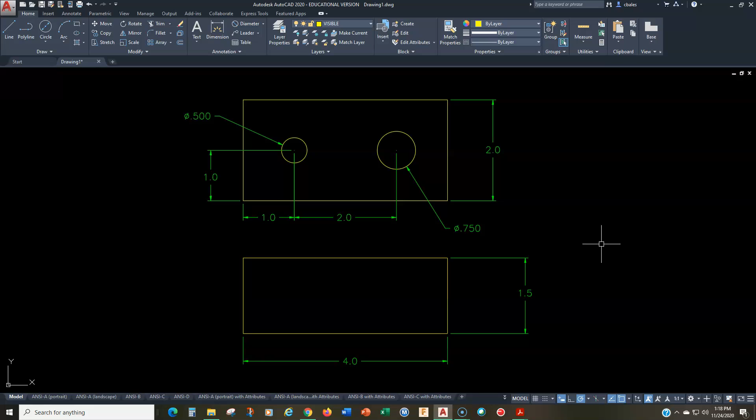Okay, so where do we go from here? Well, first let's change the top view to make this correct. This is not how we represent a tapped hole, right? So we need to change this. First of all, we're going to change this and this to a hidden circle. Now, I'd like it to have more dashes, so I'm going to change the LT scale, so we can type in LTS, and then I'm going to change this to 0.5 just to make it look a little bit better. And then we have to create a second visible circle on the inside of both of these. So the outer circle, the hidden circle, is the 3/4 inch and the 1/2 inch.

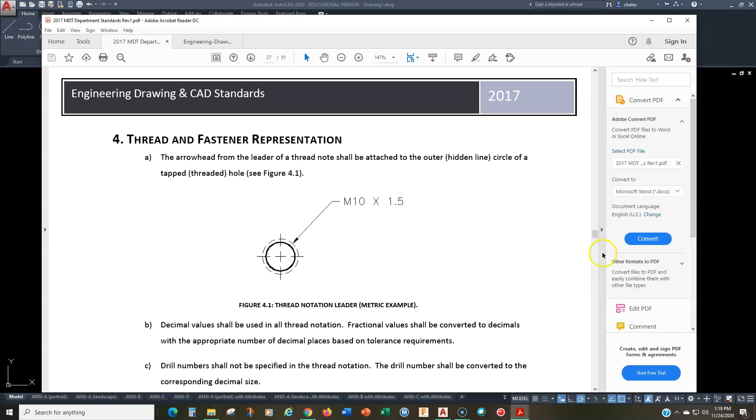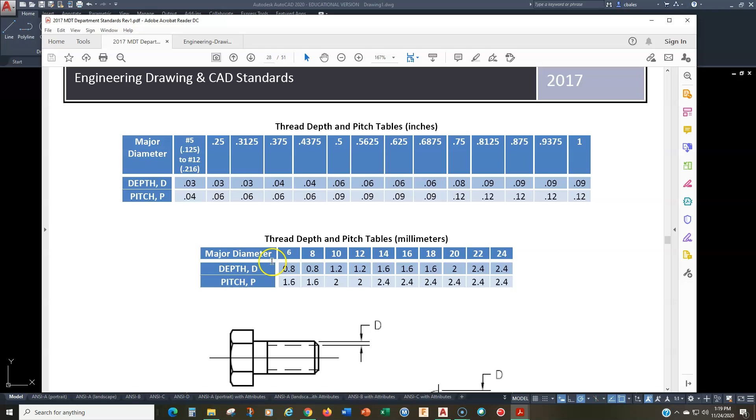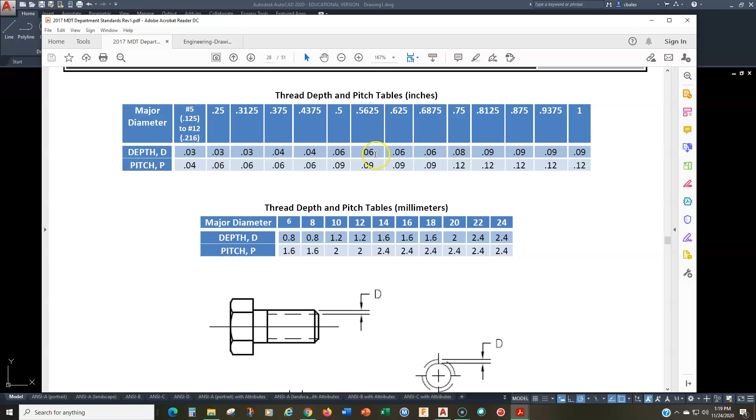So where do we get the dimensions for the offset for the visible circle? Well, we get it from our CAD standard. So I'm going to bring this over. This is our CAD standard, and I'm going to go to page 28, and you'll see right here, this is a table for inch threads. The top table is inch threads, and the bottom table is millimeters or metric threads. And what we want is that dimension D. You can see for a major diameter of a 1/2 inch, the D depth is 0.06. For 3/4 inch, the depth is 0.08. So 0.06 and 0.08.

So let's bring that across here now. Let's go to offset, 0.06, and then we're going to offset that inward. And then we're going to change this to a visible line. Very easy. So let's do that again. Offset, now this is an offset of 0.08. There we go, offset it in. And then we change that to a visible line. So that is the top view pretty much completed, minus the center lines and the dimensions.

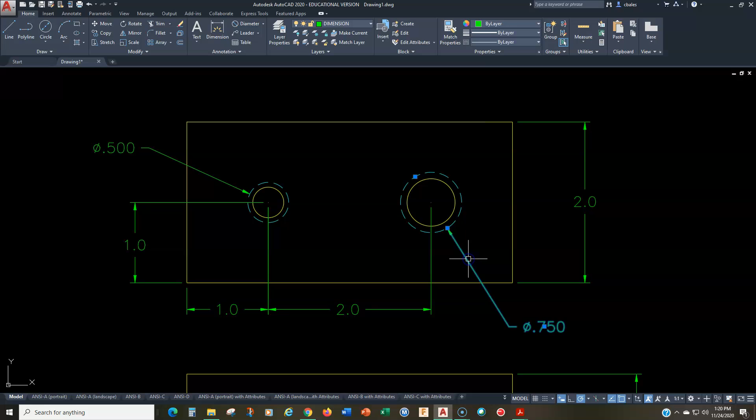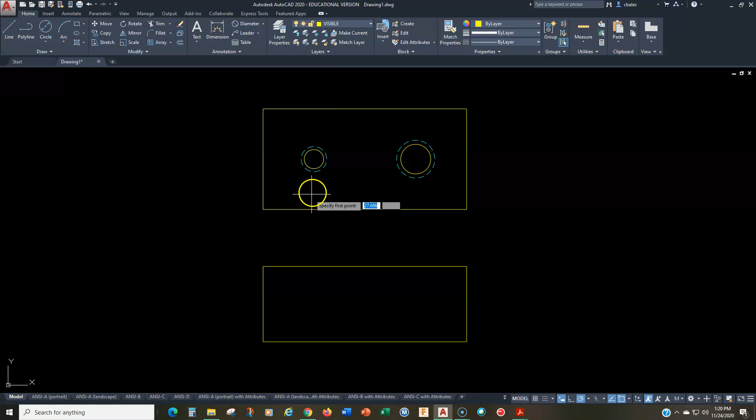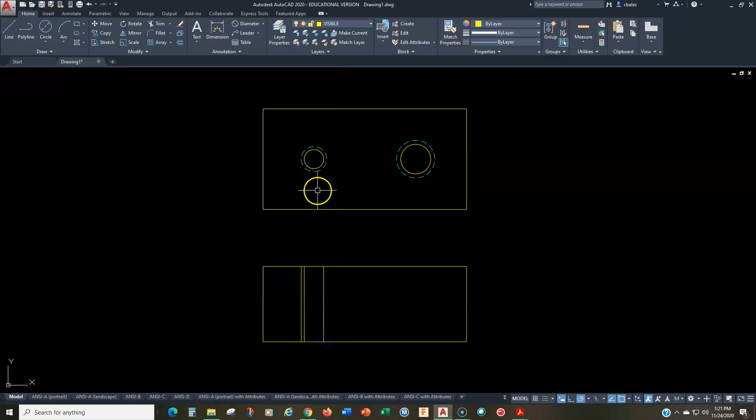So I'm going to delete that. And we don't need any of this, this is just going to make things messy. So we'll just put it right there. And again, let me just delete these because we don't need them in here. And now to work on our front view. So the first thing I'm going to do is project this edge down, and this edge down. Do the same thing over here, being very careful to get the right line. Of course, there's a million different ways you can draw this easier than the way I'm drawing it, if that's what you want to do.

These outer lines are going to be hidden. Now, if we look at the definition of this, it says we're going to draw a front section view, and it doesn't say anything about these being blind holes. So they're going to be through holes. So that's going to be the 1/2 inch major diameter hole completed. Now let's go over here and do this one. So again, we'll draw a line and I'll just project this down. Let me zoom out a little bit. Project this down here.

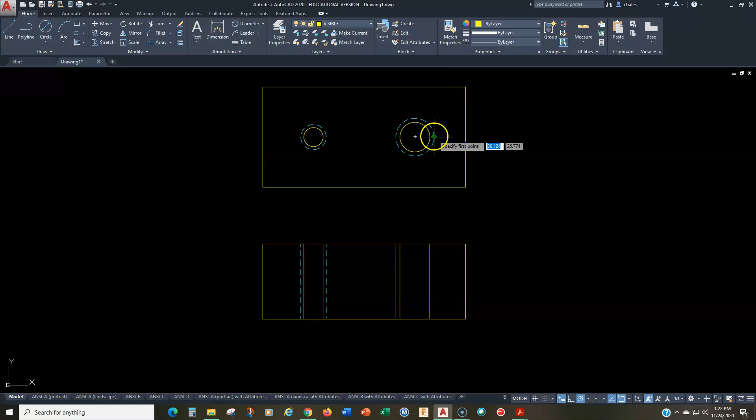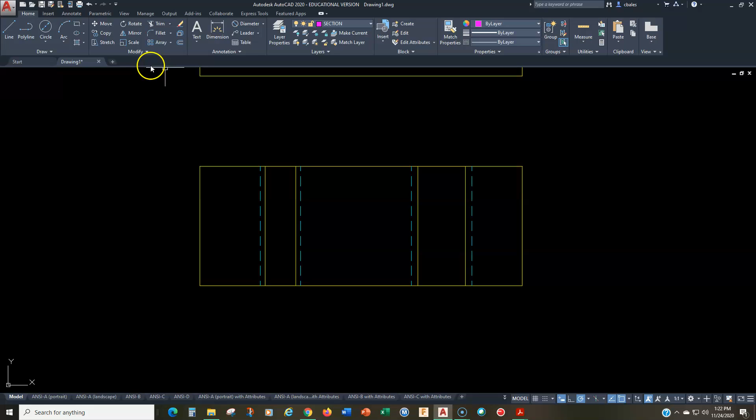All right, and then this line and this line become hidden lines. All right, now let's turn this into a section view. So I'm going to change my layer to the section line layer. And we're going to go to the hatch command. And I'm going to apply my hatching here.

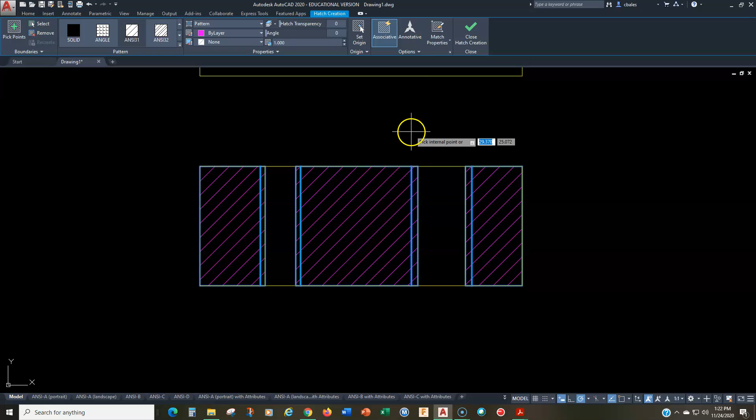And in this space, and here, and in this space, that little space, and then there. I think that scale is fine, so I'm not going to mess with that. Of course, the angle is perfect, so I'm just going to close that. And then there we go. All right. Now, the last thing that we have to do here is we have to dimension this. Okay. Actually, and add center marks.

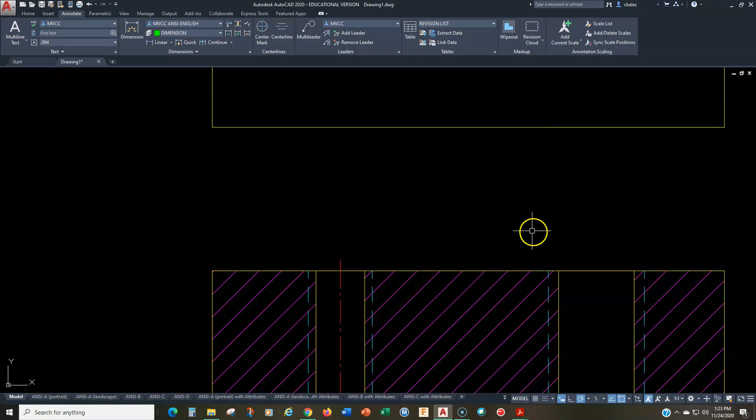Okay. So let's pull this back in again so we can see what this is. So the first one is a 1/2 inch major diameter Unified National Fine Threads Class 2. So there's one bit of information that's missing here, and that is we don't know the threads per inch on this. I did not give you the threads per inch. But we have enough to refer to the table, okay? So let's go to the back of our book, page A7, right there.

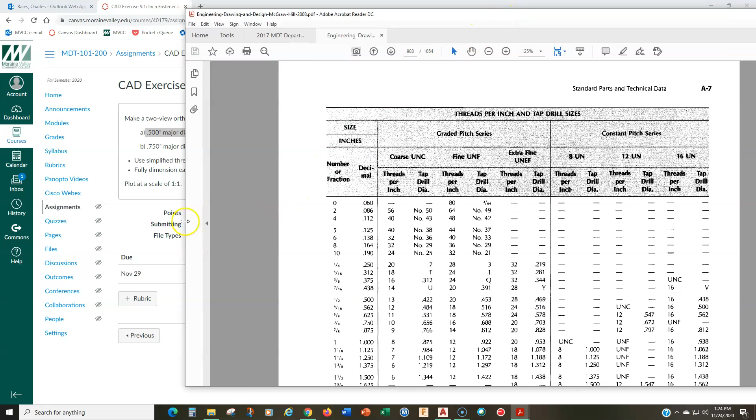Let me shrink this up a little bit so maybe we can see both. There we go. All right. And we're looking for a 1/2 inch major diameter. So I'm on page A7, and the size here, I want to go to a 1/2 inch, which is right there. And you can see for a coarse thread, the threads per inch is 13. Well, this is fine threads. So we need to go over, right there, fine. We read down and it says 20 threads per inch.

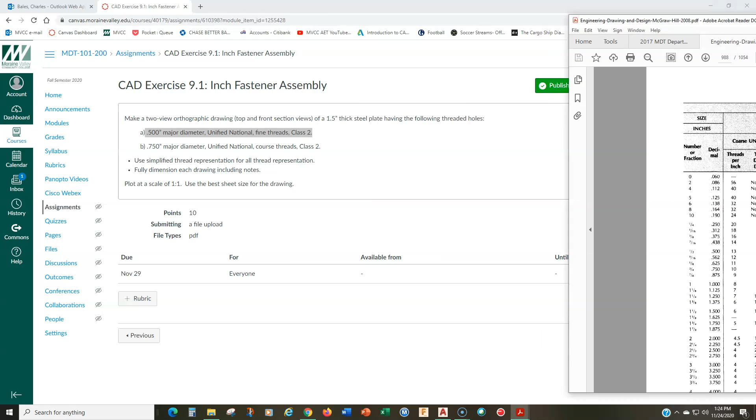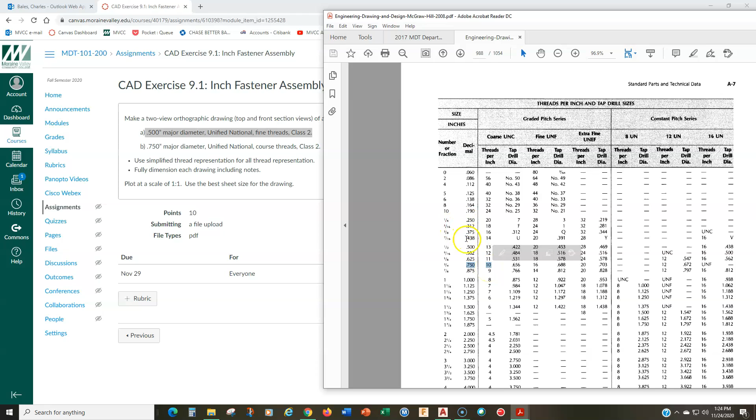Okay. So while we're here, let's do the other one. This is a 3/4 inch major diameter Unified National Coarse. So we go to 3/4 inch. Unified National Coarse is 10 threads per inch. So we got 20 threads per inch and 10 threads per inch. All right. So let's get the notation done for this. So we go back to my drawing.

We're going to use a leader, right? I suppose you could also use a... Actually, no, sorry. We are not going to use a leader. Don't use a leader, right? The leader is not what you want to use for this. We're going to use a radius or diameter dimension and just get rid of the note. Okay, so I'll show you. So we'll go here to radius. I am going to choose the outer circle here, the hidden circle for this. All right, so we'll go right there.

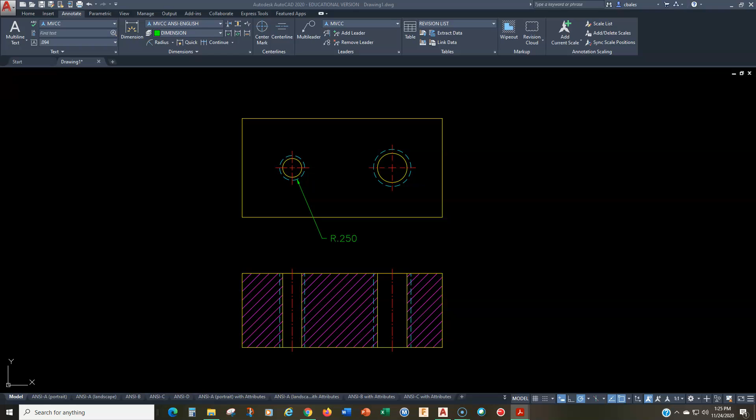All right, and the reason why I'm choosing the outer circle is because in your standard, it of course shows you we dimension to the outer circle. Okay. All right, now the radius 0.25, 0.250, I don't want any of that. So I'm just going to double click on that, delete that, and I'm going to put in what I want, which is the thread note, 0.500-20 UNF-2, and this is an internal thread, so it gets a B.

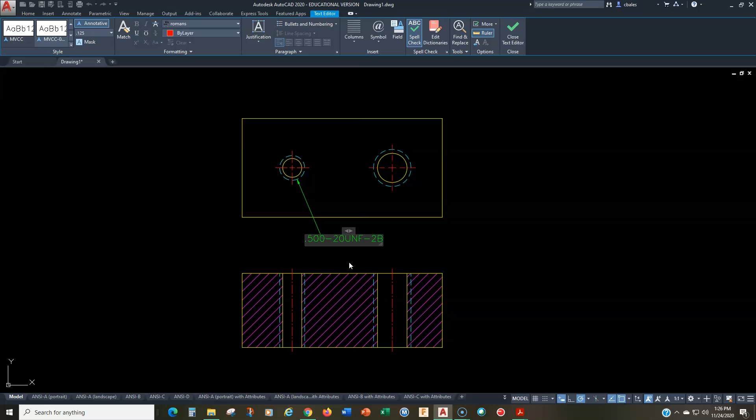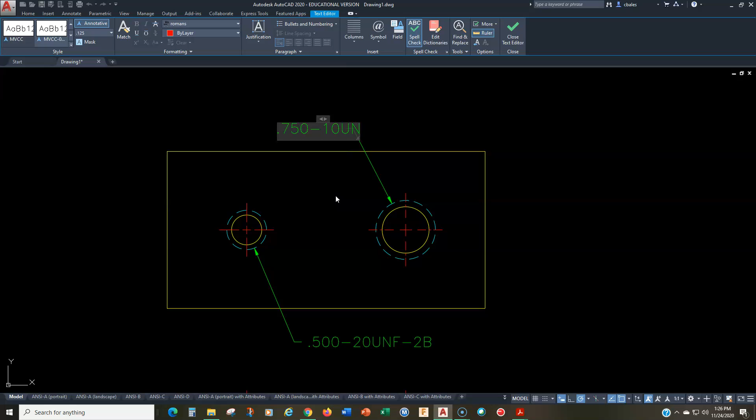All right, and that's it. Close text editor. All right, there's our thread. All right, now let's do the top one here. Whoops, sorry about that. We'll go back to radius. We'll click on the outer one, and I'll put it right up here. And then we'll double click in that, hit the delete key, and we'll go 0.750-10 UNC-2B. And that's it. All right. I think we're done with that.

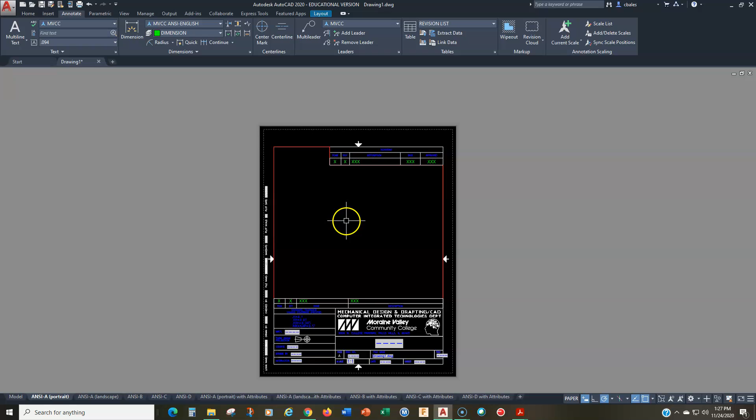All right, let's look at how, did I tell you what we're going to get this? Plot at a scale of 1 to 1. Okay, so the only thing I said is plot at a scale of 1 to 1. So let's look at a portrait drawing size sheet, and let's see if we can get that in 1 to 1. So we go like here, and 1 to 1, and in fact we can. So there you go. All right. So you can print this on an A-size portrait sheet, and that's the dimensions right there. That's drawing CAD exercise 9.1 completed.